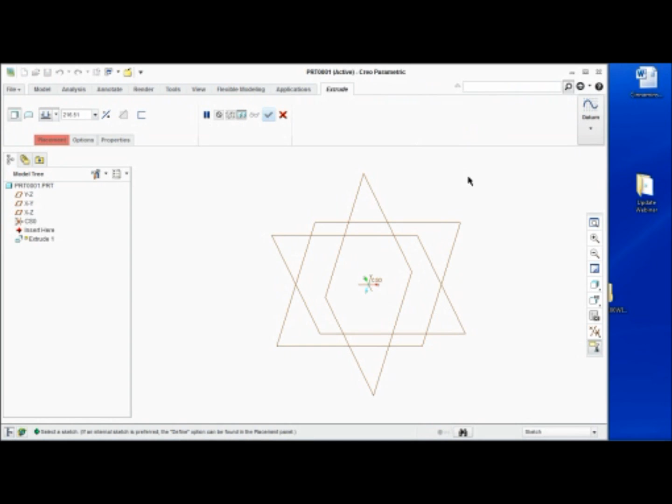So for those of you wary about the switch from Wildfire to Creo, I promise it's not nearly as difficult to find things. If you're having problems finding some of the commands you're used to in specific spots, you can always use the command search to hunt them down. Whether you're in Assembly or Sketcher or whatever you may be using, you can use that too.

You'll notice that in some cases they've taken some commands out of the interface altogether. Unless I'm missing it or it's buried somewhere, you won't find map keys through any of these tabs. But that doesn't mean we can't find it and it's not taken away. If I start to type 'map,' you'll see map keys come up, and there's the old interface. So nothing has been taken away from you out of the interface or made overly confusing, right?

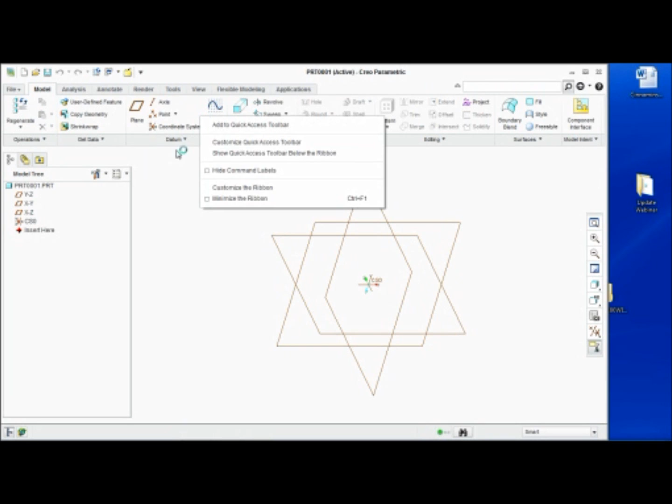They've just logically grouped commands and given you a way to search for the things you want. Also, one of the best parts is that if you right-click up in your ribbon, you can customize the ribbon. Customizing the ribbon allows you to modify not only the order of your groupings, but more.

Let's say you never ever use the Render tab. You can go in, find the Render button, pick it, and it goes away. For whatever reason, if you never use the Annotate tab, you can go in and take it away. So not only can you remove objects or essentially tabs out of the interface, you also have the ability to create new tabs.

So I'll say, here's a new tab, and I'm going to rename it to the Ben tab. In the Ben tab, I'm going to throw commands into it. So what I'm doing is creating my own tab, 100% my own. Let's say your job function only requires 20 commands. You could eliminate all of the PTC tabs, create your own tab, call it whatever you'd like, and only put in the commands you want. You couldn't do this in Wildfire 5 with the drawing package. So if you find yourself wanting to customize the interface, you've got it.

For those of you using Office 2010 products, essentially it's the exact same rules that go along with the Office 2010 ribbon interface that now go along with Creo 2.0.

Okay? Now, while we are here, for those of you that are familiar with the config.win file, which obviously was your interface file, now when you save your interface, there is no more config.win. It is now this file right here. Okay, so it is the Creo Parametric Customization.ui.

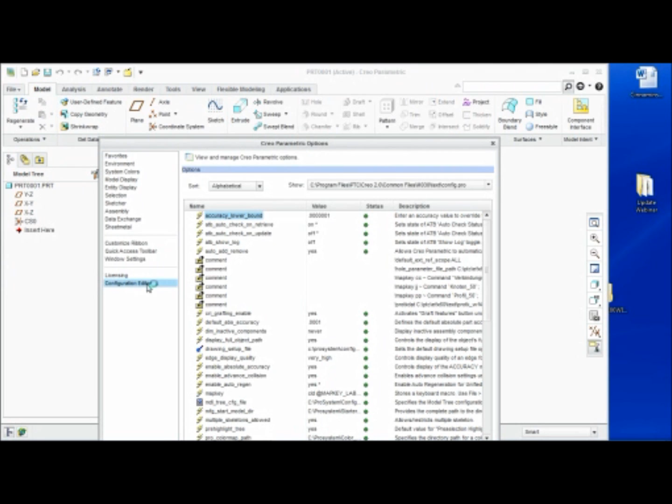Okay. All right. So a little bit about structure here. Last thing I'll talk about here as far as interface: if you notice under File and if you go to Options, essentially now PTC has condensed all of your parametric configuration, all of the software configurations in any form, whether it's colors or your config.pros or any of that stuff, is all now found out of the File and Options button right here. So you'll see all of your system colors.

Notice how here are all of your colors. Colors still work the same way. They still need that .scl file, right? But anything that you want to configure about the software now can be controlled out of one spot. And for those of you that have done a lot of configuration of the software, a lot of this stuff was all over the place, and it was a little bit hard to find everything unless you knew where everything was at. Now everything's in one spot as far as changing behavior and colors and all that other good stuff.

Okay, so for the most part, that covers our interface and structure as far as configuration goes and where to find some of those things. So now we'll dive into some of the things that we talked about showing. The first one is Sketcher. PTC hasn't changed it, but they've given you another way to get into Sketcher, and honestly, I like it quite a bit.

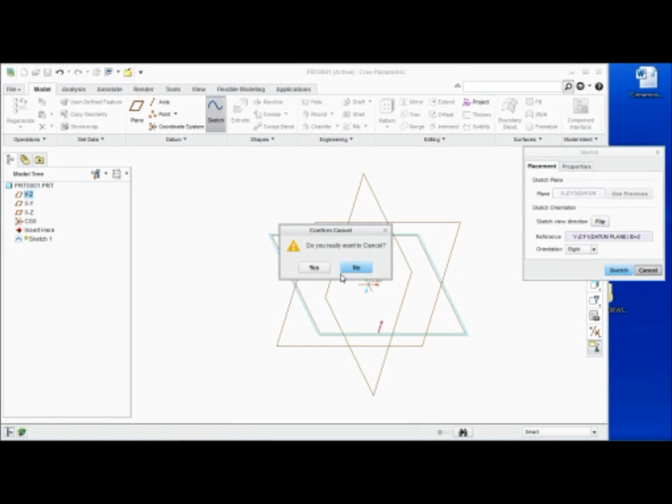In previous versions of the software, if you wanted to sketch on a datum plane or create an extrude on a datum plane, in most cases you would start your sketch tool or your extrude tool, and then once you got in, you pick it and you hit the sketch button. Same way if you're in your extrude, you right-click and say Define Internal Sketch, and then you pick this guy. And again, you can still do that.

But now, when you want to create an extrude, the easiest way is to pick the datum plane you want, start your extrude tool, and I am immediately into Sketcher. So it bypasses, only at the start, the functions of configuring the orientation of your sketching plane. If you're interested in still orienting your sketching plane, you'll still be able to do that under Sketch Setup. But PTC found out that 90% of the time, most users want to pick a datum plane or a surface and start sketching on it.

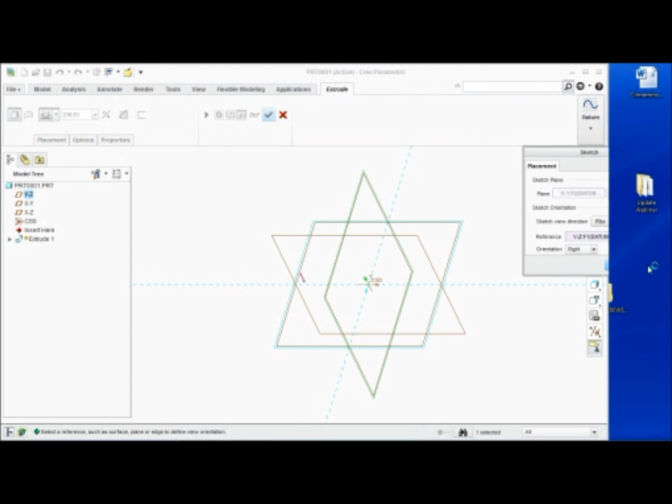And yes, they're concerned about orientation, but a majority of the time, you just hit the sketch button anyway. So why force you to hit the sketch button? Only force users to go back up and change it if they want to. So you will find all of the old functions here under Sketch Setup. But now, when I want to hop into creating an extrude, I pick a datum plane, start the extrude button, and I'm directly in the Sketcher.

Also notice by default now, Sketcher starts out in 3D. Some users love this, some users hate it, some users have to get accustomed to loving it. There is a config.pro option that will make it start in 2D. But if 75% of your company loves 3D and you hate it, there is still the sketch view. It puts you back into your 2D sketch view, and you can work from there. But by default now, you will start out in more of a 3D look.

And then from there, again, you can configure it out or hit the sketch view button to go back into your 2D looks from that point. Okay? So notice again the difference in interface. Essentially, all of these buttons that you had on your right-hand side are now over here. Notice how your constraints are exposed to you. All of them are exposed. All of your tools are exposed. You still have drop downs for those.

The two commands that have changed in Sketcher: line, which is now called line chain. That's not too hard to remember. And then also your use command. So that use command that everyone's used to is now called project. It is only the project. The offset is the use plus the offset. And then the thicken, for those of you that are in Wildfire 5, is the offset plus one tool that is there. So project is use, offset is the use plus the offset, and then thicken is the same one that is currently in Wildfire 5.

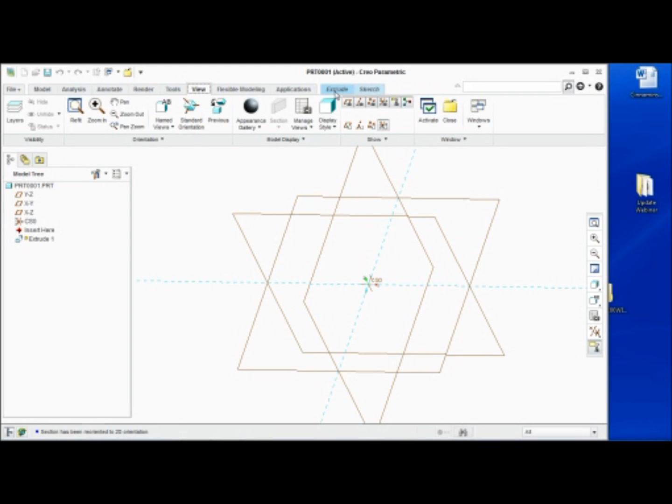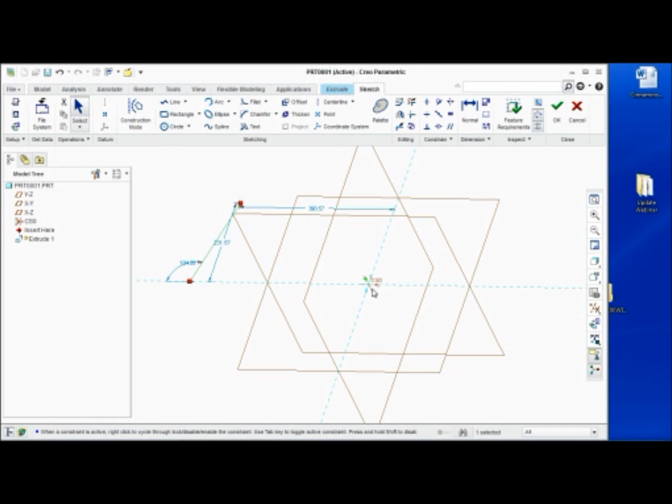Okay, so here's Sketch. Now, for those of you that are using Wildfire 5, there are some differences in Creo 1 or Creo 2. For instance, if I draw a line, notice how the Sketcher diagnostic tools are on by default now. So whenever you create your open sketches, you will see that they're open sketches. Whenever you create your closed loop, which we will do here in just a second, they are on by default now. You do not have to turn them on every single time you start your sketch.

And then, to be honest with you guys, most of this other stuff still behaves exactly the same. But one that is new here is center rectangle. So before, everybody on here being Pro/E users know that for the most part, you can only create ideas of symmetry about center lines, right? You have to put in a center line to create some type of concept of symmetry, whether it's through the intent manager or through your constraints. So if I created a line, I cannot create it symmetrical about our reference here.

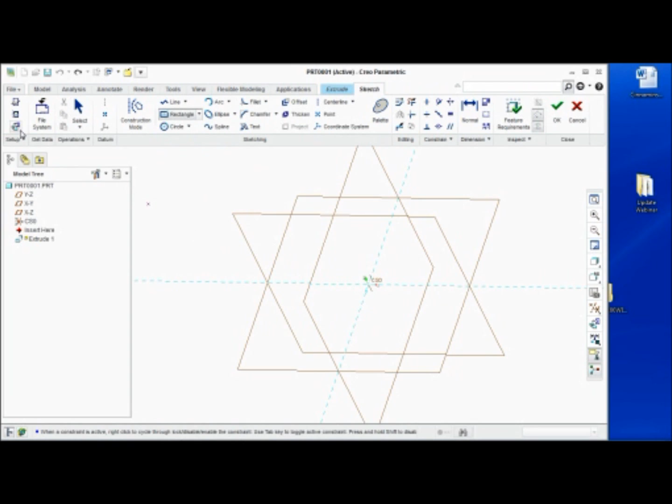But what they did do is put in something called a center rectangle. And what a center rectangle does is that it allows me to pick a center point, which in this case will be, let's get that in 2D so everybody can see that. And now I can drag symmetrical about the point that I have. So it is actually symmetrical about essentially the point based off the construction lines, even though it behaves like it's symmetrical about this specific reference.

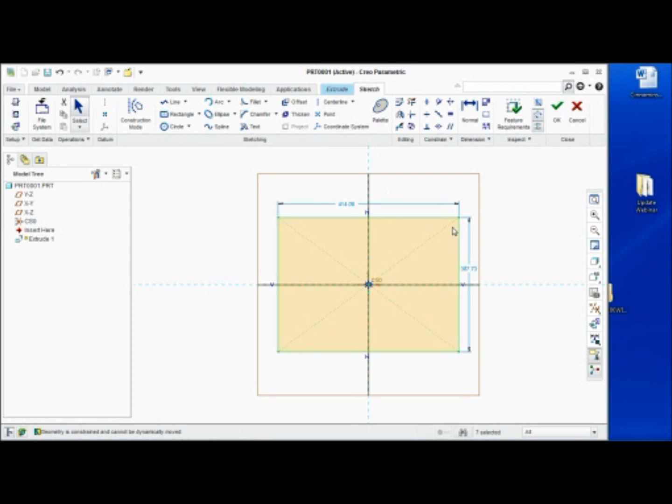It really is symmetrical about that center point because of the construction lines that I put in. If I delete the construction lines, then it goes back to being independent from what it was before. But there is that idea. Okay, so let's go ahead and put it in.

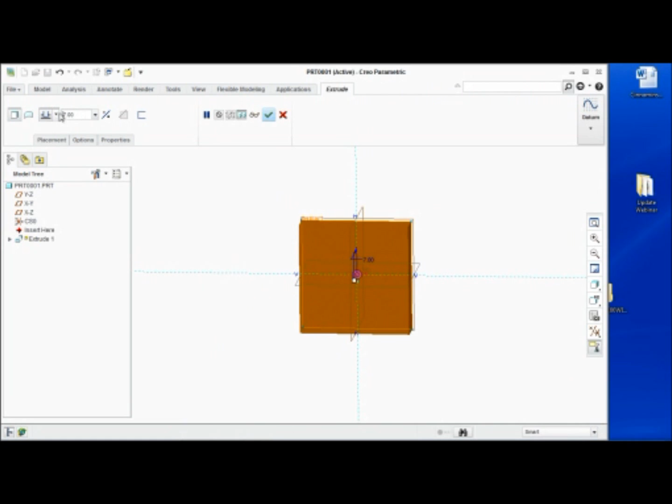There it is. We'll change this guy to, I don't know, 30 or something like that, and we'll change this guy to 30. There we are. And now we'll say, okay, there it is. Let's change. And so now we have our first feature.

Okay. So again, if I want to sketch something else here, if I pick on that front surface, again, hit the Extrude button. What's interesting about this now, once you have established geometry, and even some users in Creo 2 don't know this. I don't know why it's not promoted more, but everybody knows here that if I want to snap on to this edge or if I want to dimension from that edge in some form, it has to become a reference. You still have your references button.

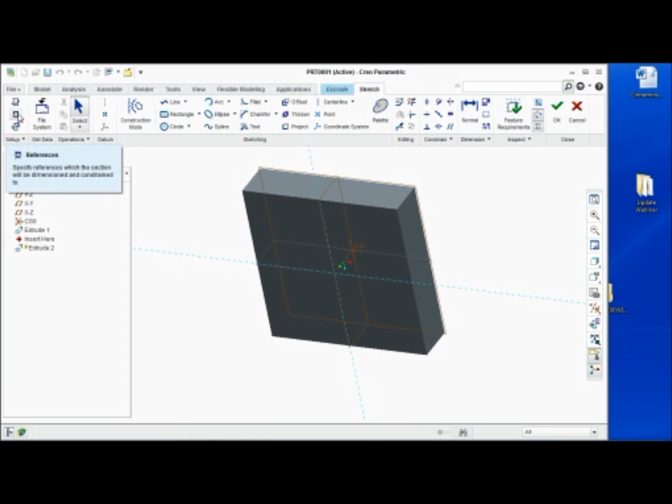But now, notice that if I start a command, and let's say now for whatever reason I want to snap on to this edge, what you can do is if you hold the Alt button, see how it drops the point, or essentially the line point, and if I pick now and I let go of my Alt, it now becomes a reference. So what I call this is references on the fly. It only works though if you are in a command.

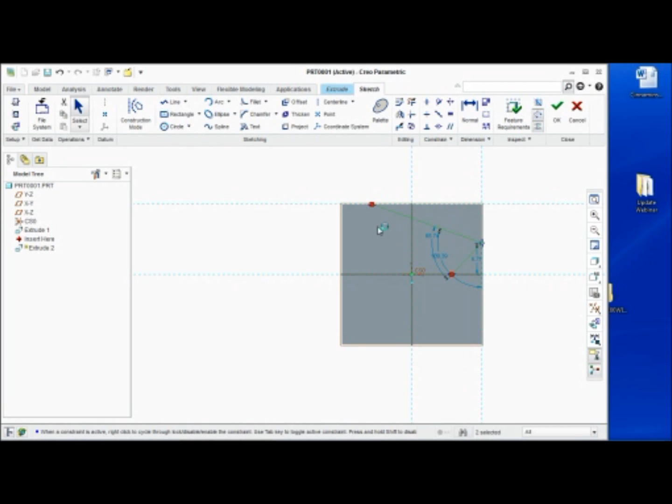So if I'm out of a command, I can hold the Alt button and nothing really happens. But if I'm in a command, hold the Alt button, it drops it, allows me to pick it, and now I have the ability to snap on. So yes, you can still do it from your references. And again, you can pick edges compared to surfaces, but essentially at this point in time, really what it is is reference creation on the fly using your Alt button. So just hold that Alt button, and it makes it easy for you to do that, okay?

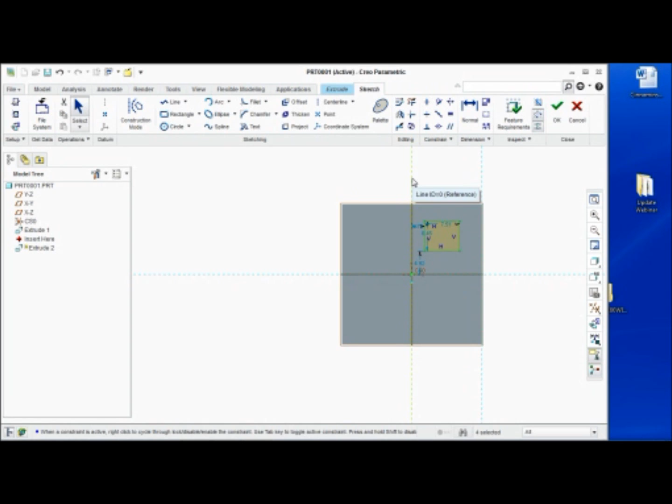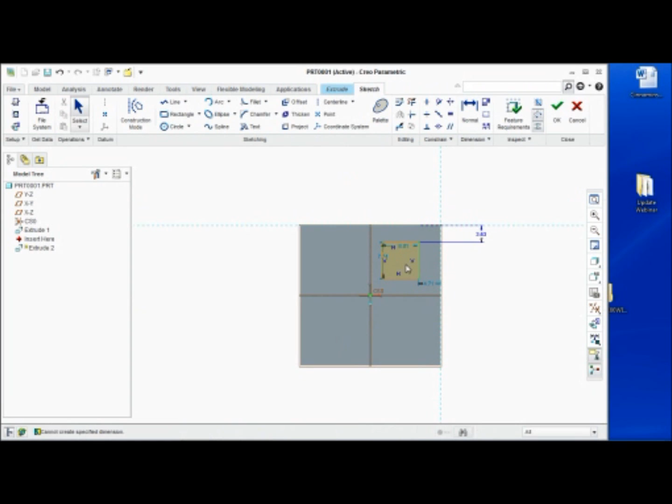And now when I hit OK, one thing I did want to show you is obviously when you're creating your extrude, that's still the same, no difference. But if you do right-click, you can now add taper, or essentially you can add draft as you are creating your extrude. So if you wanted to create some type of cone, you don't have to create a blend. You don't have to create a cylinder and then add draft. You can just create your circle, and then at that point in time, put in your draft.

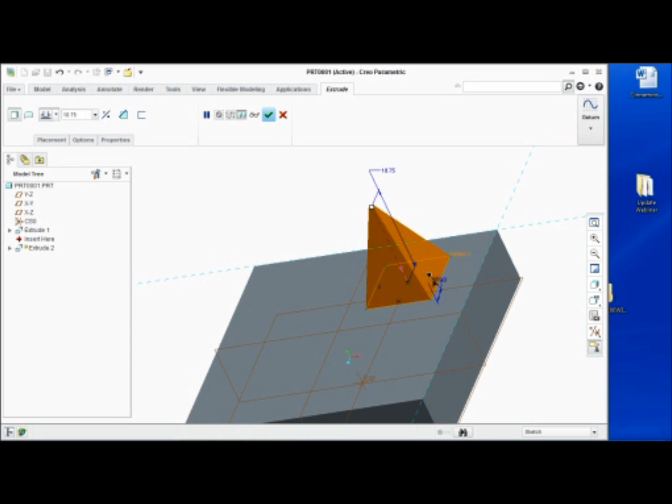Notice how it will collapse on itself. There are more complicated shapes that won't work, but simple shapes like this, it will collapse on itself and it's still produced. But I can now add draft while I am essentially in the extrude tool. Okay, so pretty nice stuff in the sketcher. Some simplified things as far as how they are allowing you to get in Sketcher, and some differences in some tools and those type of functions, but just made it a little bit easier to deal with Sketcher in general.

So we've covered interface. We've covered some of the options in Sketcher, and then we also covered the taper function. Okay, and so now another thing that by default is on is, for those of you that were familiar in Wildfire 5 with the dynamic editing option. Everybody on here should have a good idea of edit and edit definition. And for those of you that use dynamic edit, essentially what it was was real-time rendering as you were dragging objects around. So again, I'll do this quickly here.

Everybody in Wildfire 5 was essentially used to the behavior that if I picked this guy and did edit or double-clicked it, either way, you would get the dimensional values that existed. And so if I come in here and change this value or any other of these values, I would have to wait until I hit the regenerate button or Control G, and then any changes I had made would regenerate at that point in time. So that's essentially the behavior in Wildfire 5.

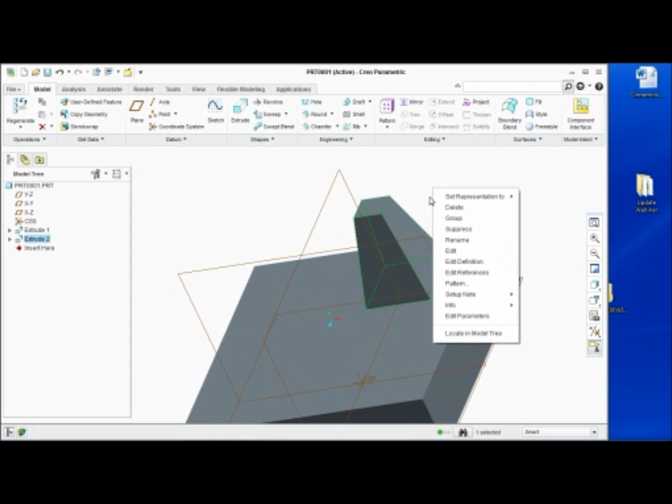What they introduced was the dynamic editing functionality, and now by default in all of the Creos, dynamic editing, or what they now call auto-regenerate, is the default behavior of the edit function. So let's edit this guy and watch this behave: if I double-click this guy, first of all, I can drag this guy around. Oops, sorry, wrong one. But notice how this feature is moving along with it.

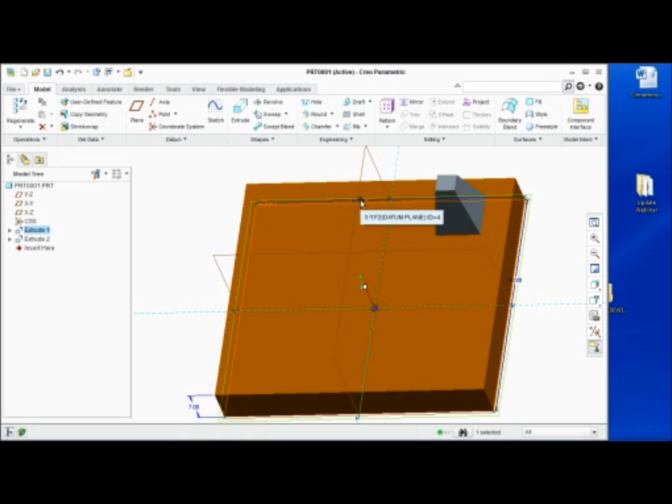Before, we literally would have to wait until we hit Control G or regenerate to see that happen. But now, any child object that's related to the feature being edited will update in real time as I'm dragging or changing values through edit. It is the default behavior now of the software. Again, if you right-click when you're in edit mode, you see auto-regenerate. Essentially, that will turn it on or off.

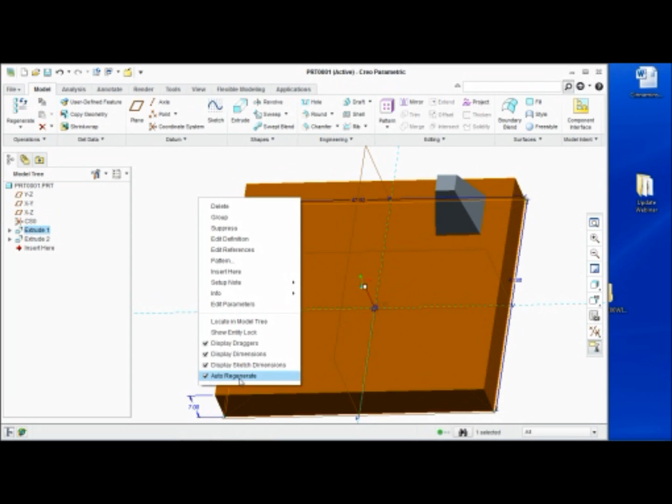So if you don't like this, you can turn it off. But I think it's kind of slick and makes it nice, unless you have something really difficult to regenerate and you may be having problems with hanging up in regeneration times. You can turn it on, you can turn it off. It makes it nice to see what's happening as you are editing those guys. So auto-regenerate turns that on and off, and those are the new edit capabilities within Creo 2.

Let me see here, just one second, guys. There is a question, and I just want to see it real quick, and maybe I can answer it on the fly. Okay.

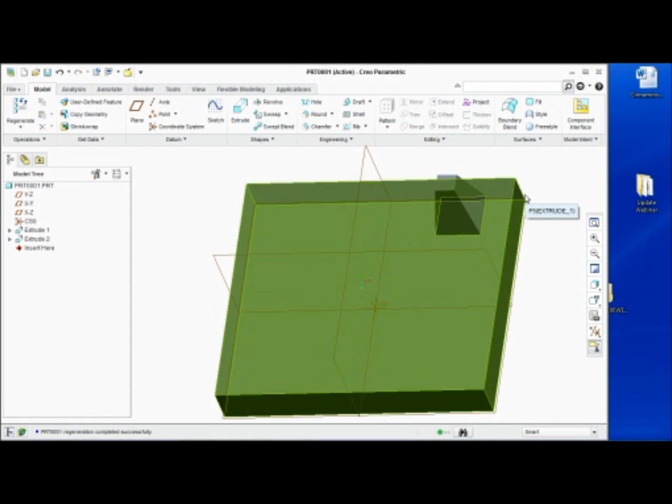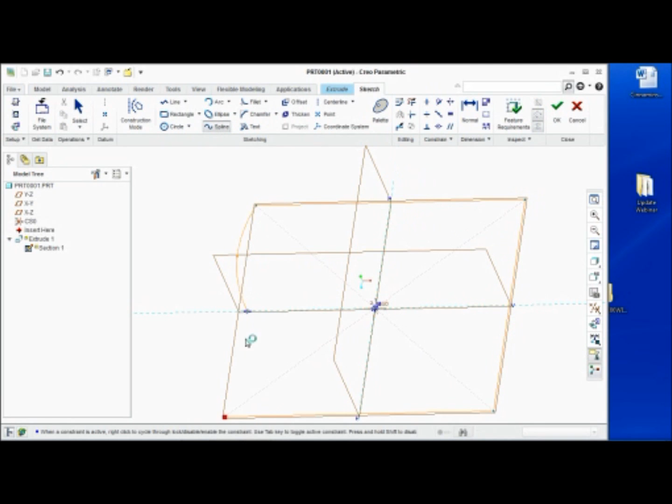So, quick question, and I'm going to do this real quick while we're talking, because it is a good point and it should be brought up. I'm going to put a round quickly on this guy. There we are. Now I'll come back into my original extrude, delete this guy, and we still get the same warning. And let's put in some other shape.

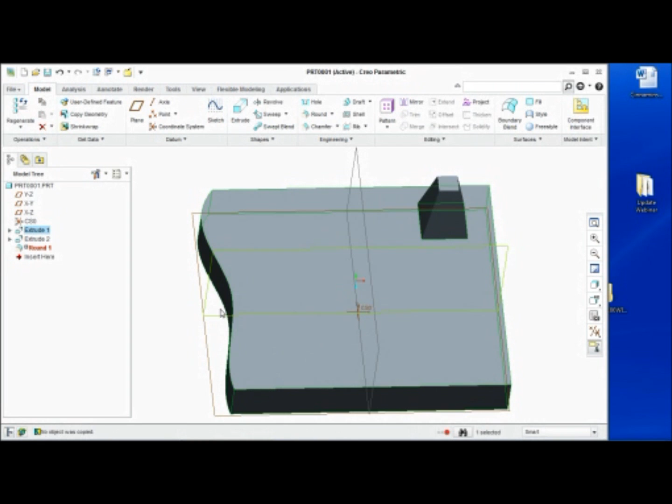Now, when you do produce a failure, for those of you not using at least Wildfire 5 and not used to the interface, I still can do a save, right? So it will save with failures. Some people are okay with that; most are not. But yes, you still can save with a failure. For the gentleman that asked that question, hopefully that answers it. It's something good to bring up. I usually don't answer on the fly like that, but it was a good point.

All right. So just a few ideas here. We'll work off to the side for these. I'll show you the new blend tool. This is a total revamp, even for those of you in Wildfire 5, and I'm pretty sure it's a total revamped tool for Creo as well. So underneath the shapes, you will find blend.

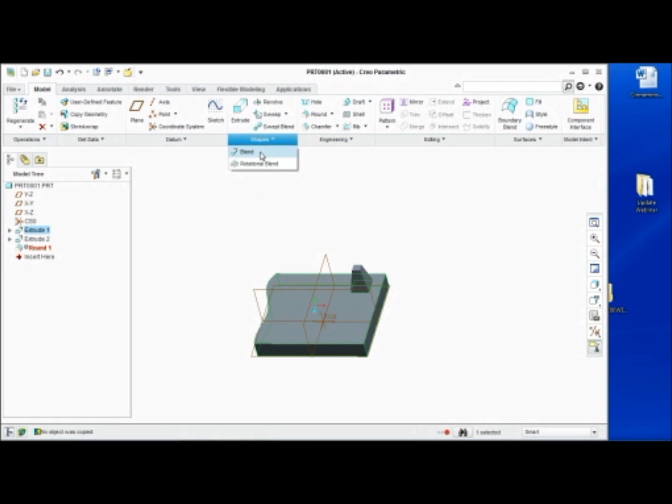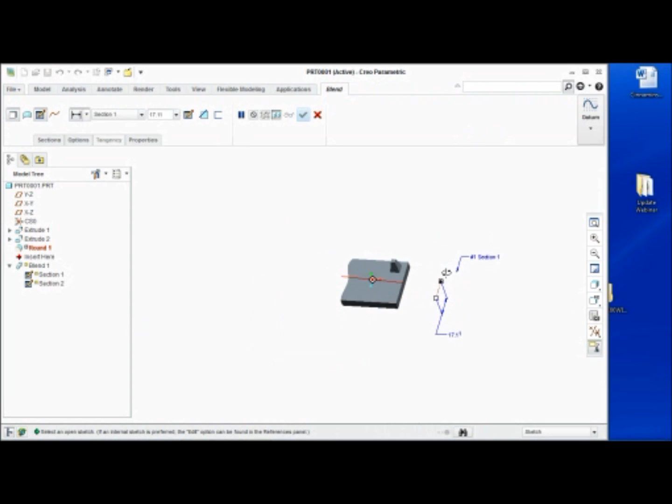Now I can define the internal shape, and I'll quickly create something about like that. You still see your start points, right? You can switch them by picking another point, right-clicking, and saying start point. None of that has changed. But now, notice how instead of creating and doing the toggle function, it allows me to drag out to my next position.

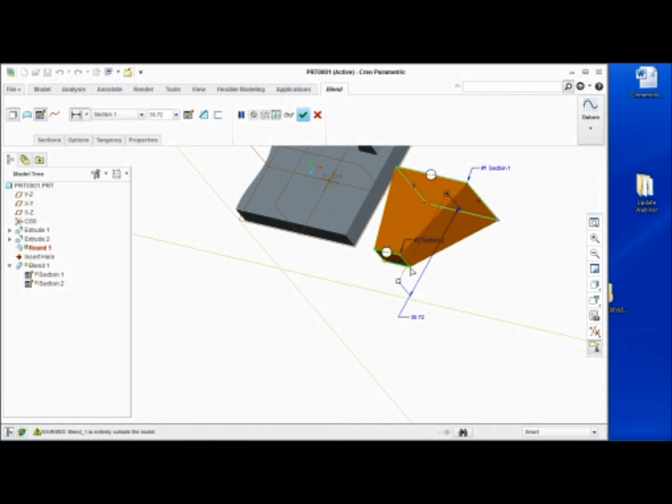And if you right-click again, I can say sketch. Notice how it shows me where my previous sketch was. Just for simplicity for our demo, there's my next shape, and when I hit OK, notice how it shows me the result of my sketch in real time as I drag that guy around. Also notice how I can drag my second section around in my blend.

So this is a total revamp of that tool and how that behaves. So blend tool is quite a bit different, and for the essence of time, we're already at 12:40.

Time flies when you're having fun.

I would have gone through the Helical Sweep button, but they have made the Helical Sweep tool much more efficient, easier to find, especially when it comes to the variable pitch and how you define it. Makes it a lot easier to go through that.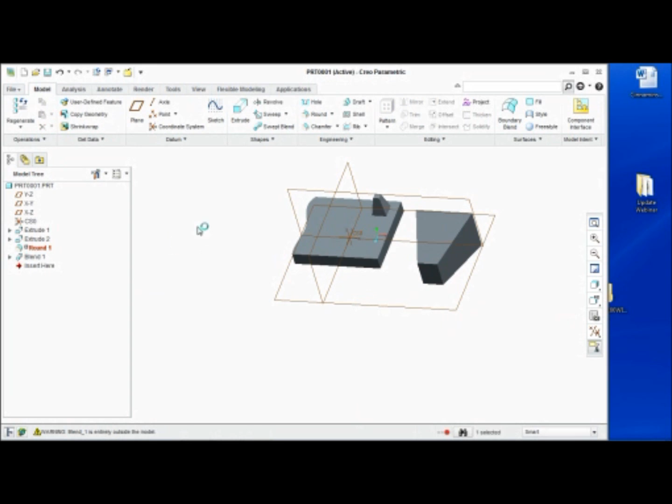One other tool we'll deal with, and we can do this in a number of different ways, but it's kind of cool to see it in Sketcher, not necessarily in parts. But let me open up my part that I have right here. Okay, here is section. Here's a new cross-sectioning tool. This is a Creo 2.0.

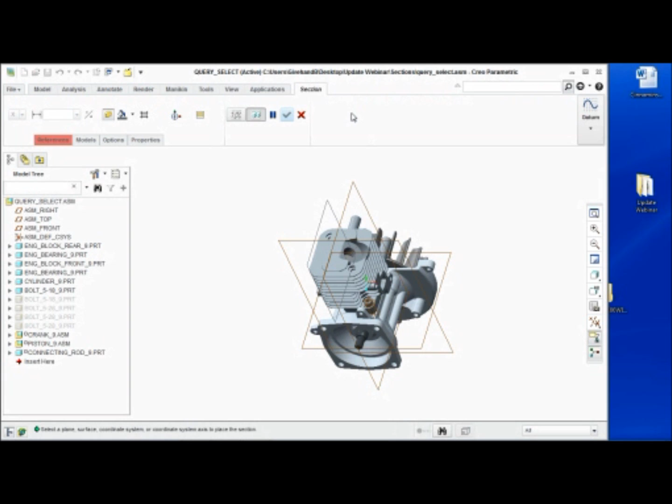If I hit cross-section before, everybody knew you had to have a surface or a plane or something in that spot. Notice how now when I pick that plane, yes, I can get a cross-section, but also notice how I can dynamically create a cross-section. And while I'm at it, let's go ahead and put a color on it so we can see the different surfaces as we are cutting.

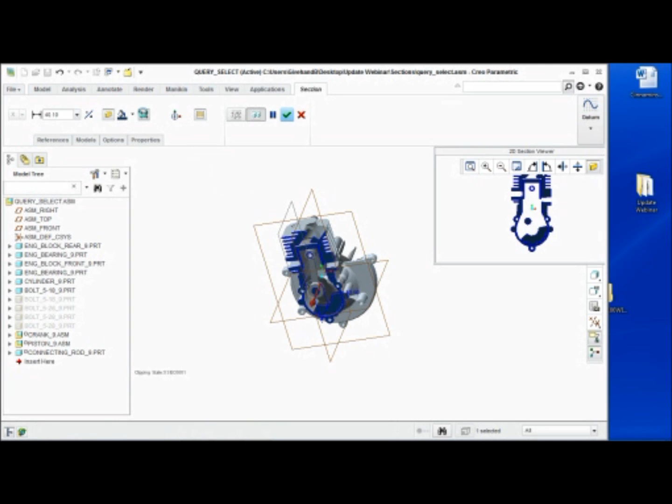Also notice how it will also give me essentially a 2D look in this orientation as I'm dragging through. So this is the real time what my cross-section will look like. I can put on some cross-hatching if I want to. And then if I do hit the OK button, it still goes into my usual sections area.

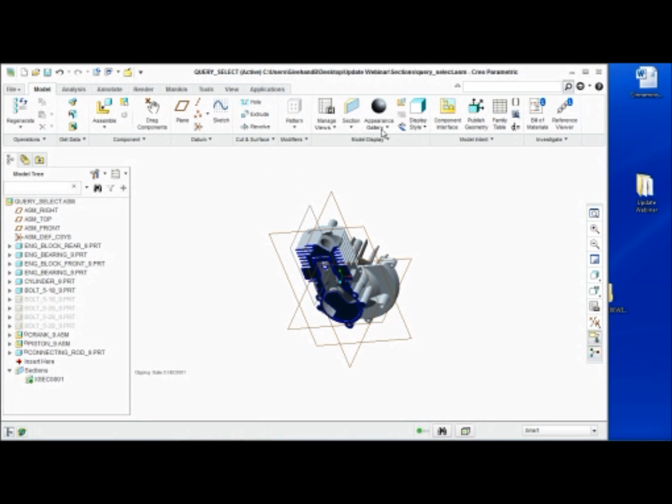So I have no cross-section, and then I have my cross-section. There it is. So when I hit that OK button, it automatically saves it over into my usual spot that I would expect it to be. But essentially now I just pick the cross-section button and drag it from that point in time. And again, it's just more of a dynamic way, and whether it's in the part or assembly, doesn't make a difference.

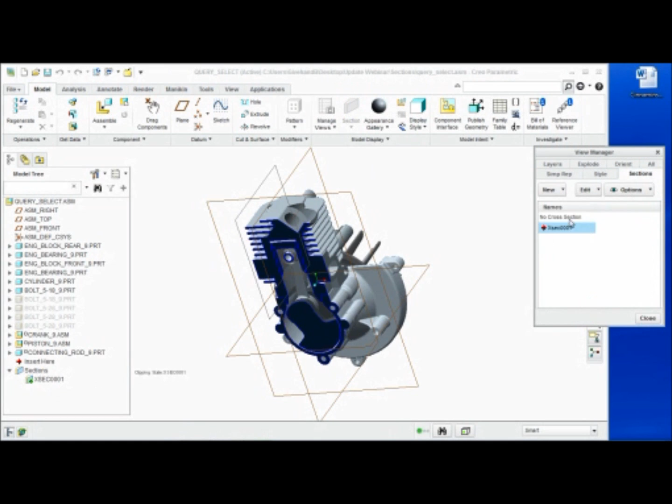Also notice how when I created cross sections, they essentially get put into the model tree. I believe you can take your tree config and take these out of here, but by default now it does put it into the model tree at the bottom, kind of like a footer, for those of you that are familiar with the footer idea. Okay, so there is the cross section. That is a 2.0 enhancement, and it makes creating cross sections much easier than what it did before.

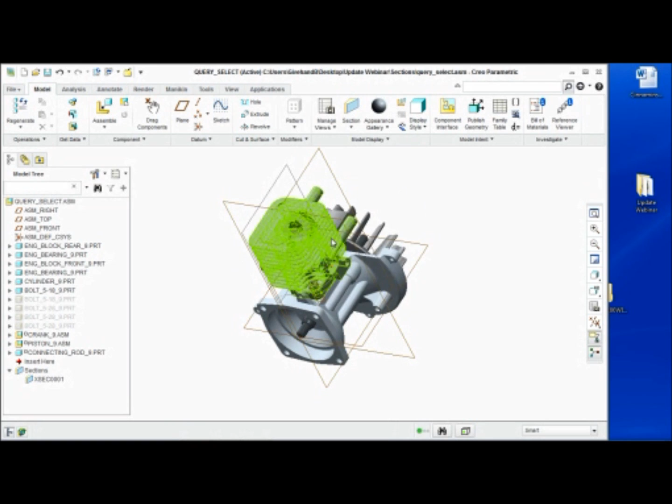Okay, we'll switch gears from our part stuff and hop right into some of our assembly stuff. The major thing I'll show you in just a second, but one thing I did want to show you is that when I open up an assembly, they have now put a search directly into the model tree. So if I didn't know where bolt was, I can come in, type in BOLT, hit the enter button, and it will find all bolts. And I should hit star here, sorry guys, bolt.

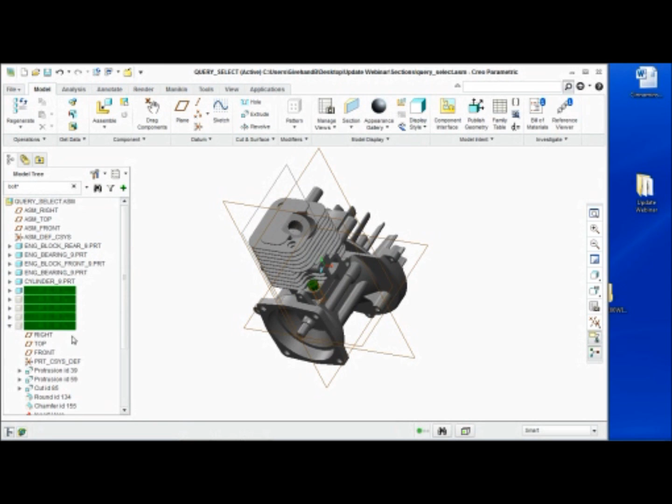And if I hit star bolt, it will show me where all of my bolts are, and it will highlight any bolts that I might have right here. So here are all my bolts, there they are. And as I go through and look at those, it highlights bolts. This is not selection, it's just highlight. So again, if I type in CYL for cylinder, there we are, it highlights cylinder, and now I can see my cylinder.

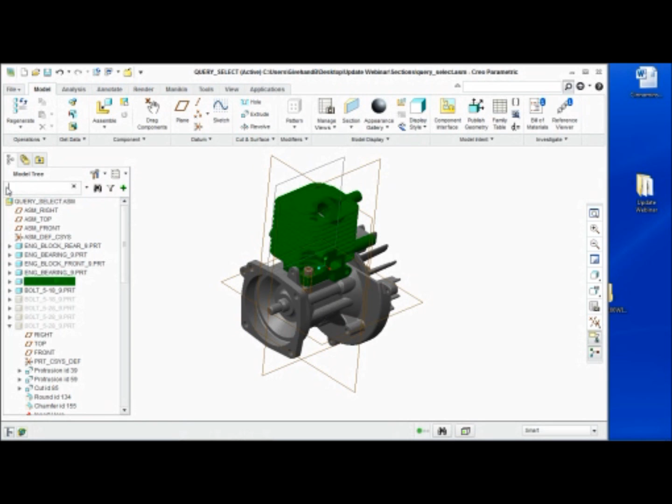So instead of always having to go up through your search tools or your find tools, you do have searching capabilities directly within the interface. And then also, and I can't remember honestly if this is a 1 or a 2 enhancement, now if I pick a component and right click, I do have locate in model tree, which will locate it, and if it's in a subassembly, it will locate it in the model tree and expand for you. And then also I can say select parent.

So if a component is part of a top level assembly, I can also see what subassembly or top level assembly it's in. So picking a component, right-clicking and doing that will also get you to that component. And again, it's just the idea and concept of being able to find things quicker within an assembly.

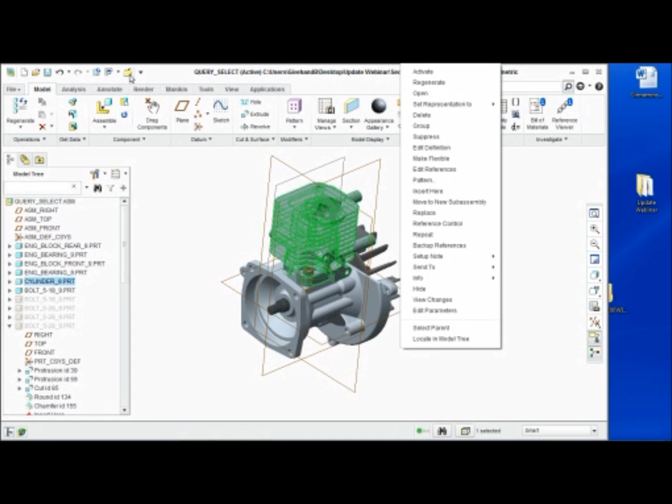Now let's go back here. We'll do this on a little bit different of an assembly, and I'm going to cover the major change that has gone on in the assembly part of it. There is no more mate, align, and insert. They have been replaced with coincident and distance.

Just for a frame of reference, everybody should know that the difference between mate and align was a flip - two surfaces pointing at each other, two surfaces pointing in the same direction. Mate and align covered that, and underneath you'd find the offset command, the coincident command, or the orient command. So what PTC did was instead of allowing mate, align, and insert, they now just use coincident and distance.

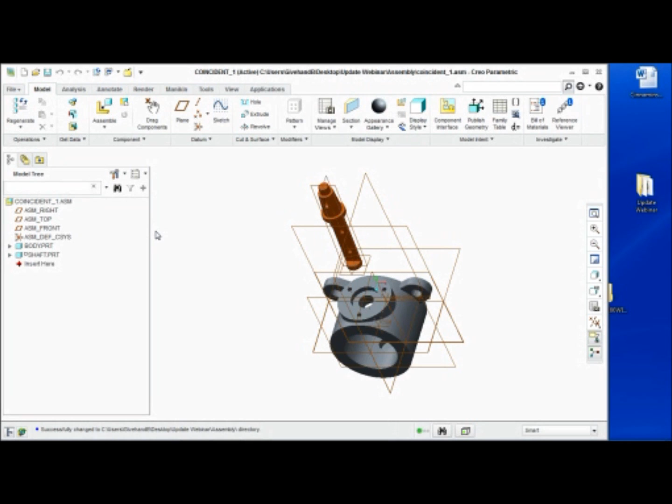Okay, so we go ahead and turn off. We'll leave our datums on for this. So now let's go ahead and bring this guy back in. Let's delete him, let's bring back in our shaft.

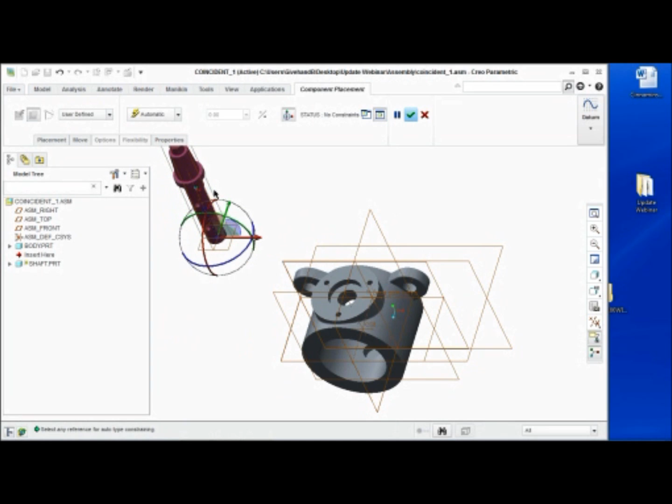Now if I come in, first of all, you're going to notice a difference in color - this is an under-constrained component, shown in purple. You will also find your dragger. So instead of holding the Control and Alt button, can you still hold the Control button? The answer is yes, you still can do that. But you will now have the 3D dragger that allows you to position and orientation if you want to.

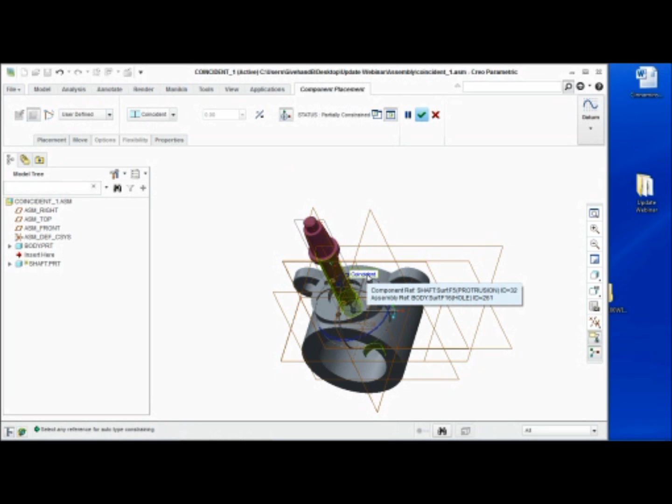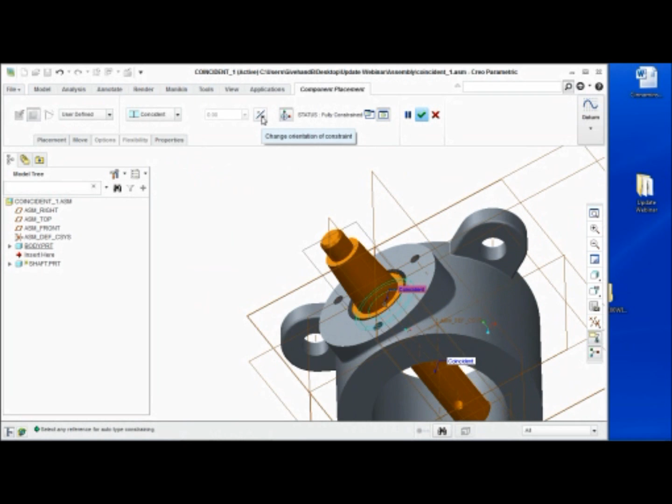But now if I pick a surface and pick a surface, that's its guess. So insert is now coincident. Coincident also takes care of mate and align, and if you want to switch between mate and align there's a flip of the button. For instance, it guessed coincident for my two cylindrical surfaces, which takes the place of insert. Now I'm going to say I want this surface and that surface, and let's see what it guesses - it guessed coincident. Now if I want to switch from the mate idea to the align idea, all I have to do is either right-click and say flip, or pick the button, and there you go.

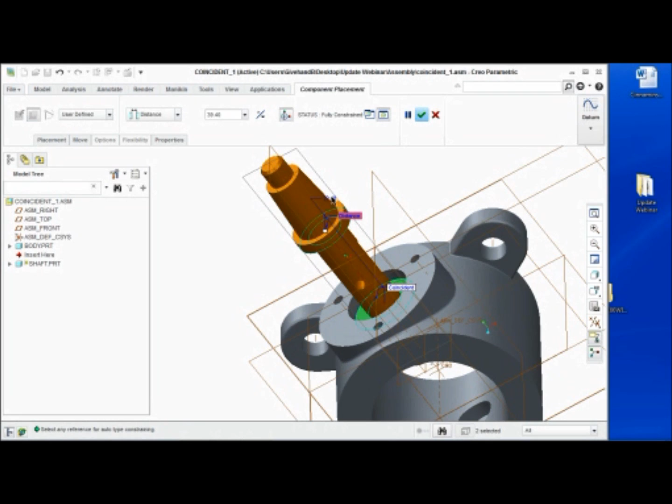So again, insert, mate, and align have now become coincident and distance. The only difference between coincident and distance is if I right-click and say distance, this is offset. That's it. So whether I double-click and change a value or whatever it may be, they condensed 3 commands down into 2 commands, and there's a flip of the button that switches it from mate to align. It really isn't any more different than that in any form.

So if you notice here, let's clear all of these out just so you can see, there are a few other new commands, but they're pretty straightforward. If I hit my drop down, here's distance, here's angle offset. Everybody should be fairly familiar with that. There's now parallel, which makes sense, obviously. You have your coincident, normal, coplanar, centered, tangent, fix, and default. Those are now the constraints that you would use.

They're pretty straightforward. Any assembly that you have in the previous versions in Wildfire 5 and back, once you bring it into any one of the Creo softwares, they will update with all of the new constraints. One question I always get is, well, is there a problem with that? I have not seen a problem with that - that doesn't mean there isn't one out there. I have not personally seen any problems with any users bringing up new assemblies in Creo and having a problem with that. So that essentially, guys, is what now the new constraints are.

Any of your motion constraints are still the same. I promise you, if I could hit this drop down right now, let me clear it - if I could hit this drop down right now, none of this over here has changed in any form. And actually they put in this gimbal connection, and I haven't even messed with it yet, and I probably need to just to see what it does. Okay, alright, so those are the major changes.

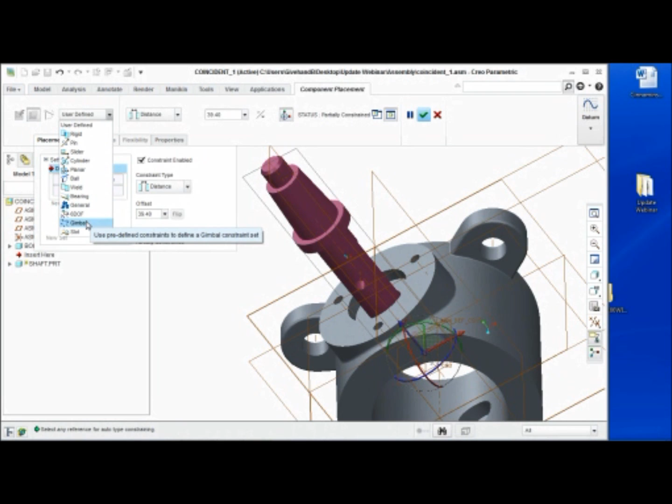Well, you know what, let me do one more change in the assembly, and the reason is just because for those of you that are doing simplified reps, this kind of becomes important. But notice how now, if I hit the open button, and I'm going to do this guy right here, notice how there's now something called open subset.

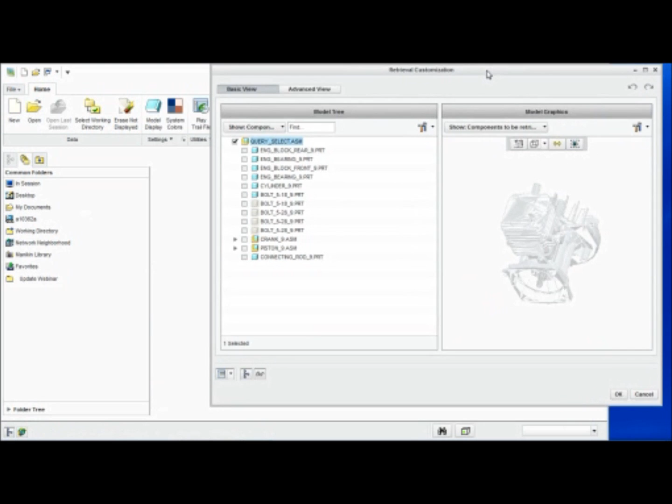Before this was called open rep, but it's now also called open subset. In my opinion, this is essentially simplified reps on the fly. So if you don't have a simplified rep, and I hit open subset, what I get is an interface that allows me to create a simplified rep essentially on the fly.

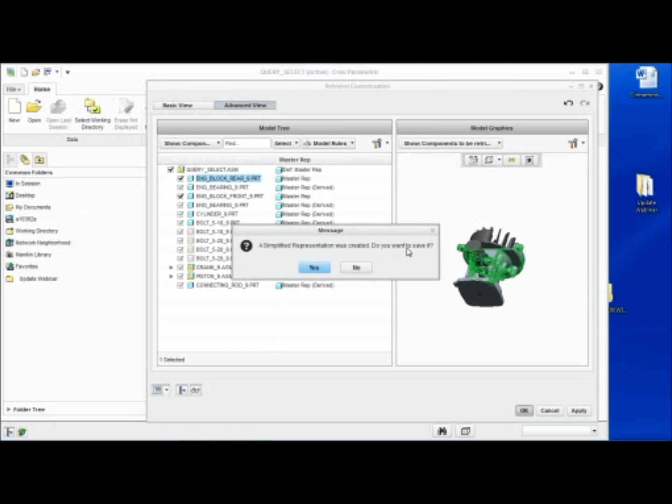What I can do here is turn certain components off. Let's say I don't want the engine block front, I don't want the engine block rear, and I also want to change this one to some type of graphics or geometry rep, but I still have the preview. When I do this and get into it, it asks if I want to save this as a simplified rep. I say yes, call it rep 1, and now when I open this up, there it is. Oh, did I turn it back on?

Maybe I accidentally turned it back on. Oh yeah, we turned it back into a master rep. Sorry guys, this is what I wanted, there it is. That's what it was supposed to look like. So now I've got that simplified rep on the fly, and I can save it. There you go. So you don't have to open up this large assembly to create your simplified rep.

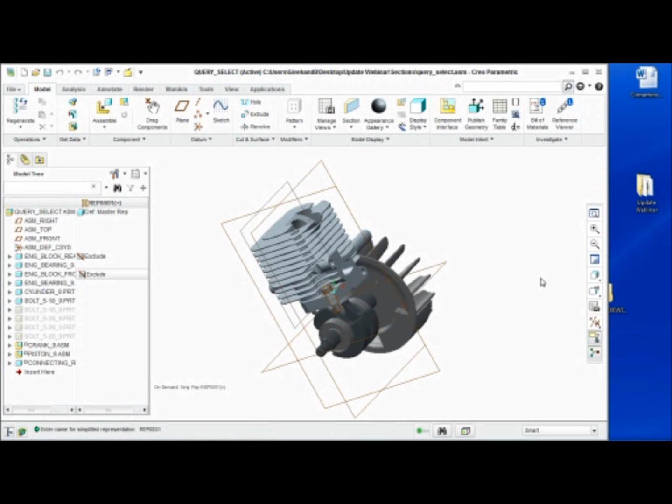You can still do it out of the view manager, still see simple rep and do it that way. But you now can create that on the fly before you ever even open up that assembly, and it makes it nice so you don't have to load all that extra information when you're not necessarily wanting to. So, simplified reps on the fly, the new constraints, and some of the search tools within Creo 2, the Creo 2 release of software.

The last thing we'll cover is a little bit of sheet metal. We'll start a sheet metal part here from scratch. We'll do something simple, just create... let's do it the way I just got done talking about. We'll pick a datum plane and pick planar.

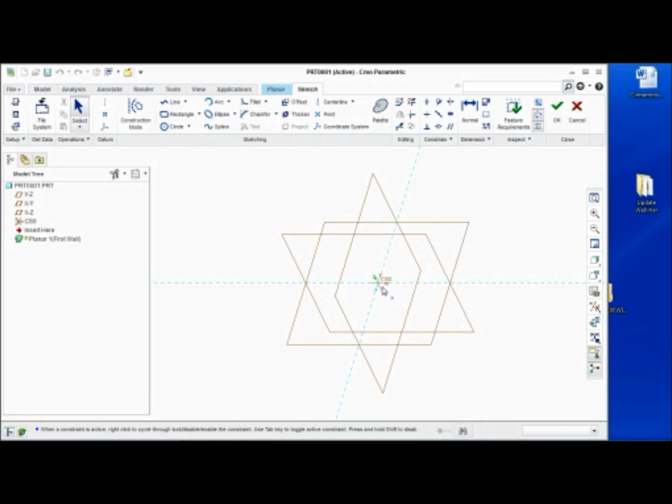Create something fairly simple here. There you go, something about like that. We'll say okay, so here's our planar first wall that we have.

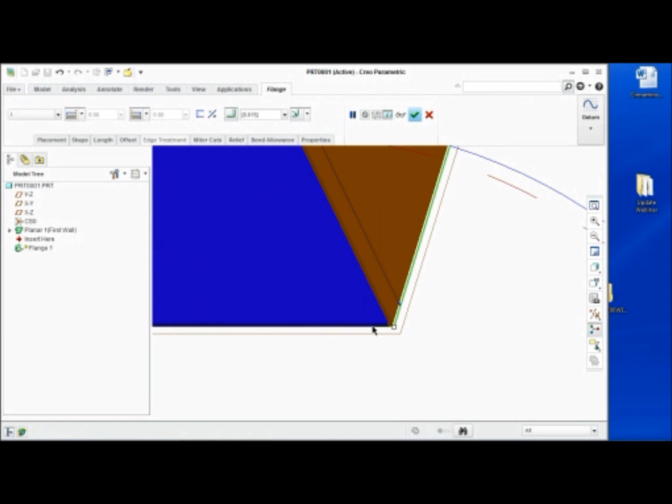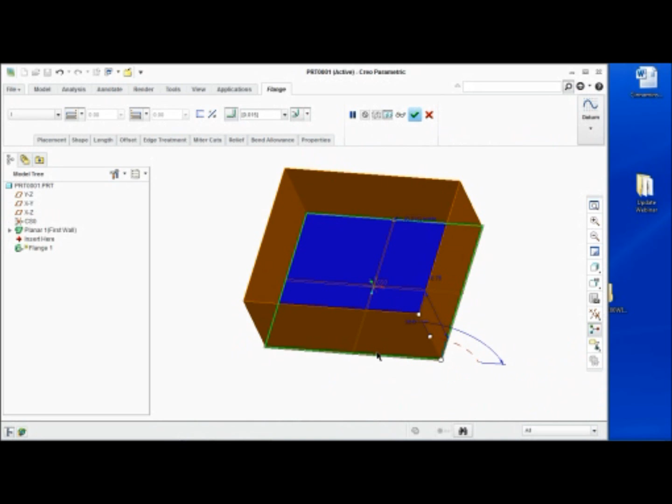For those of you who didn't know this is possible, if I hit my flange button and pick this edge, then hold the shift button, I can pick the rest of my edges at once and create essentially that box all at once. It's essentially the loop command, and you can do that out of the flange. What's nice is it takes into account all of your edges and miters that you might have to deal with in the corners, so you can handle that a little bit easier. So essentially, by picking an edge, holding shift, and picking the other edges either individually or by loop selection, you can do this.

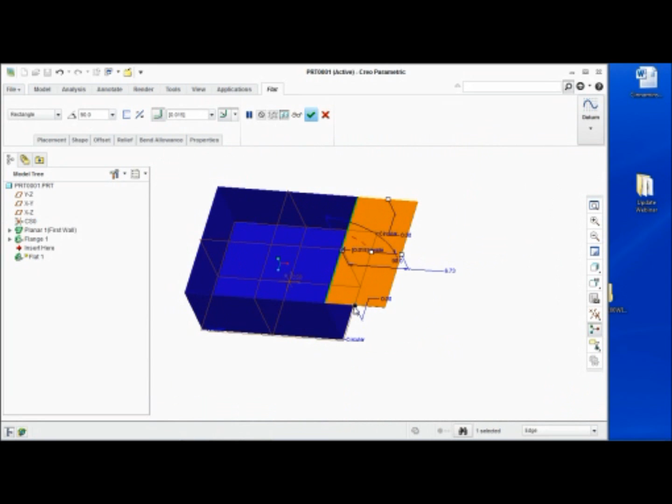You could actually do that in Wildfire 5 too, so for those of you who have been using this, it shouldn't be a big deal. Now when I create my flat, if I pick an edge to create it, let's pick the other edge so it goes the other way. There we are, controlling the flat through all of your nodes, dragging them back and forth.

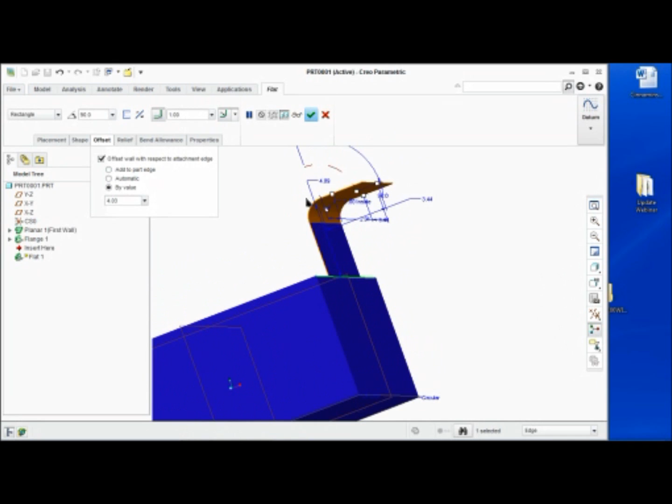That stuff's pretty straightforward. Let's put a bigger bend radius in that corner. One thing I like here is under the offset, if I pick that and say by value, notice how if I drag this up, it will create the appropriate geometry, and if I drag it down, it will also create the appropriate geometry. That's kind of nice to see work too.

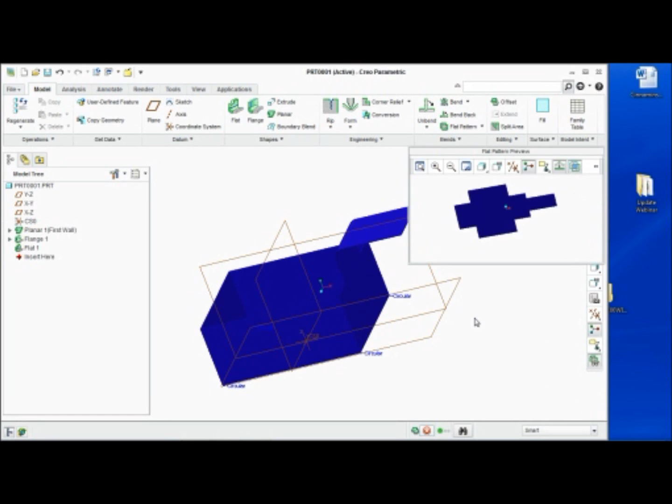You'll find that under the offset command. Let me drag this out here. Other new things about this is that there's essentially a flat pattern preview now. So as I'm creating my sheet metal part, if I'm concerned about size or whatever it may be, let's drag this out so we can see size here. I can actually see dimensional sizes of my flat pattern preview.

You also can create a family table instance if that's how you create your flat patterns to begin with. You can create your instances out of this right here. So you can see that preview, and again, as I adjust and add things, that changes.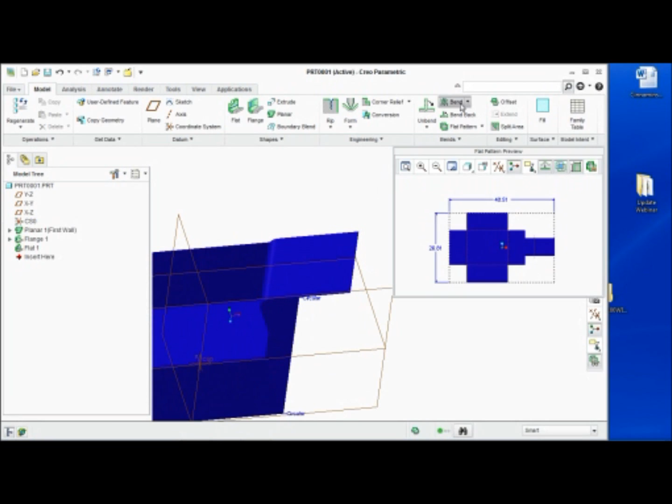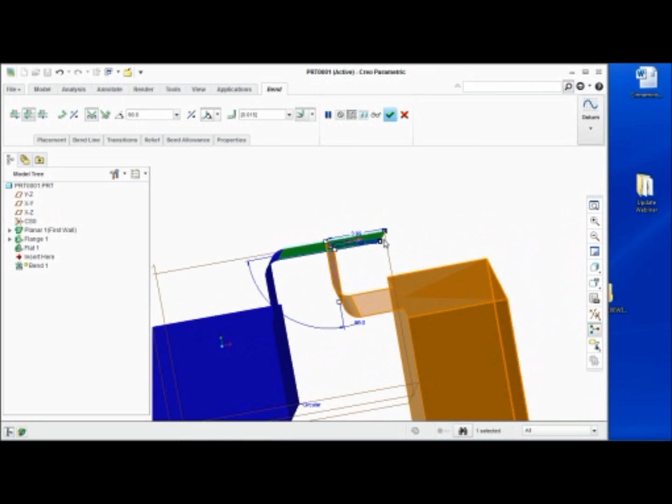Another new thing I really like about Creo is under the Bend tab. For those of you familiar with the old Bend tab, you know it wasn't the easiest thing to use—there were a lot of buttons to pick and click. Now essentially what I do is establish a bend line just by dragging. I can dimensionally control that bend line, and even though we bend the entire part about it, the bend is now controlled just through that point.

So here's my bend. There it is—we bent it kind of the wrong way, but that's okay, no big deal. So there's my bend, but essentially you just establish on what surface, and from where to where you want to create your bend. You drag, you can control it, and then you get your bend and your definitions. Before you had to create sketches and do those types of things, and it was quite a bit more difficult to create that stuff.

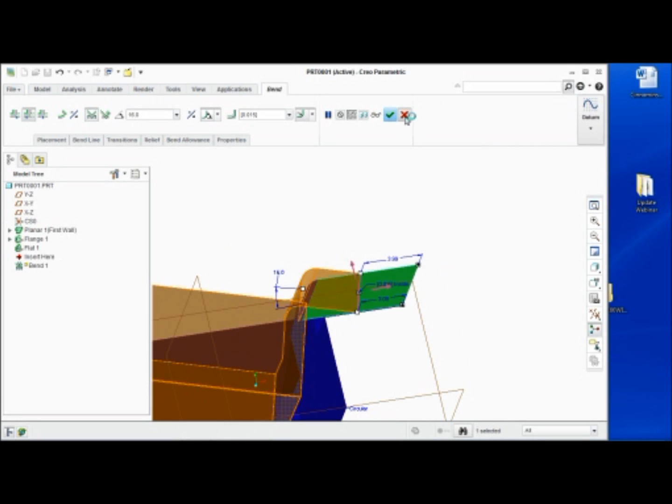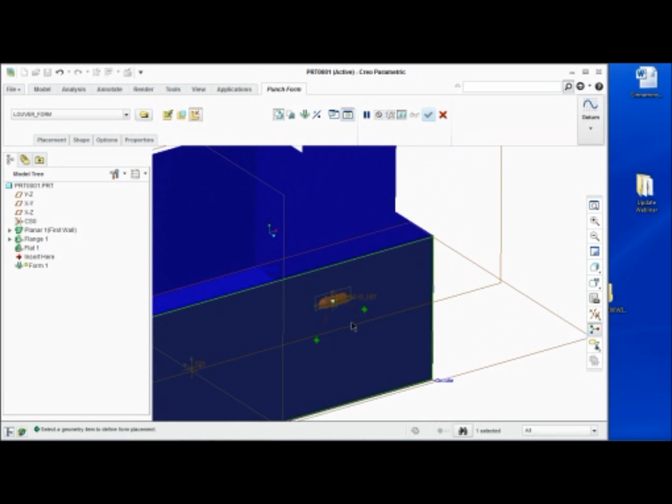Okay, last thing I'll show here—let's kill that bend, it might cause me to go haywire. Let's close this. For those of you who use form ideas within the software—we didn't cover this, but in Wildfire 5 they introduced the concept of the on-surface coordinate system. If your original form is based off that on-surface coordinate system, you no longer have to essentially assemble that form.

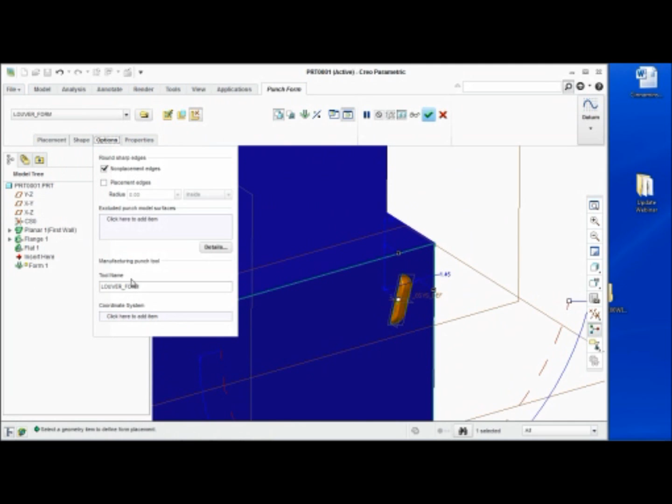So what I can do here is come in and just drag as far as placement, but I can also drag rotation of my form, and then, still the same as before, come in and remove surfaces for my removal surfaces. So it's much easier to define and control those forms instead of assembling them. Essentially you drop it, attach it to your references for location, and then if you want, you can add rotation into it.

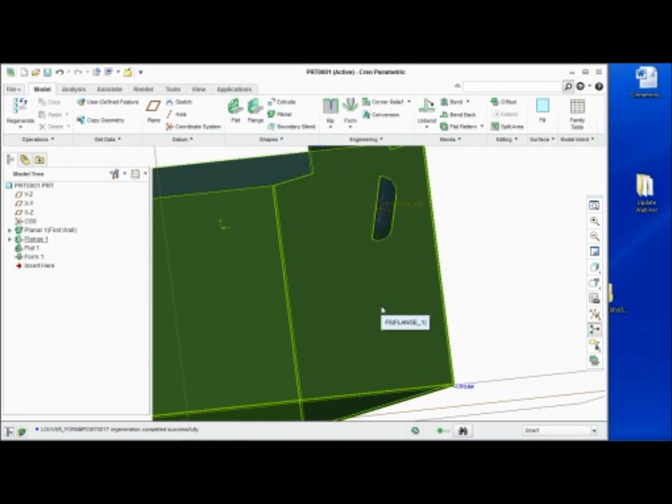So again, just a few previews, some differences—there's quite a few differences. There's some other stuff that might be a little more interesting for you guys to check out, but where are we at time-wise? We're getting kind of close.

One thing I do want to make you guys aware of, if you're interested in all the what's new—if you come into your reference documents on ptc.com, for Creo Parametric 2.0, and go find your reference documents, drag all the way down to the bottom, you'll find what's new in Creo 2 Parametric, Direct, and Simulate. It's a PDF, but if you're ever wondering where that what's new document is, you can find it right under the support page, under all of your documents. It's about a 134-page PDF showing most of what's changed and where to find it, at least what's been publicly published. So it's an easy way to find your what's new guides.

So, alright, time-wise it looks like we're right up against it.